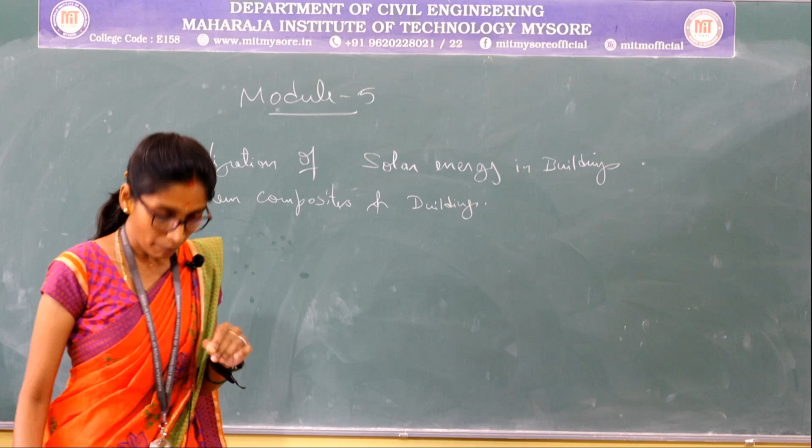Next, further I will be dealing with green composites, and then water utilization in buildings.

Next, I will be dealing with the low energy approach to water management.

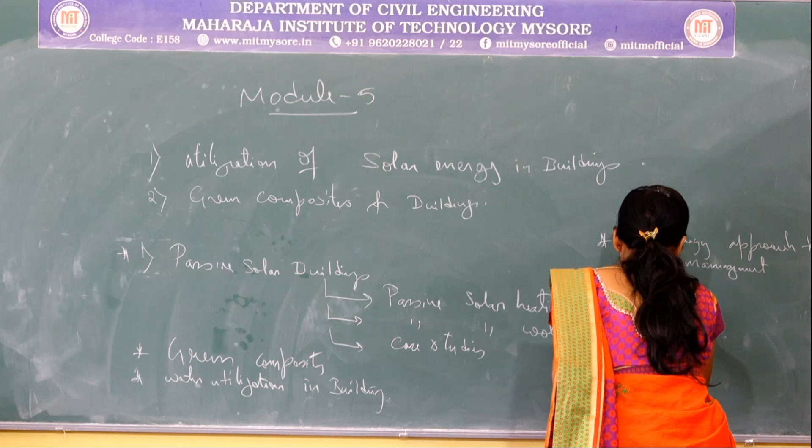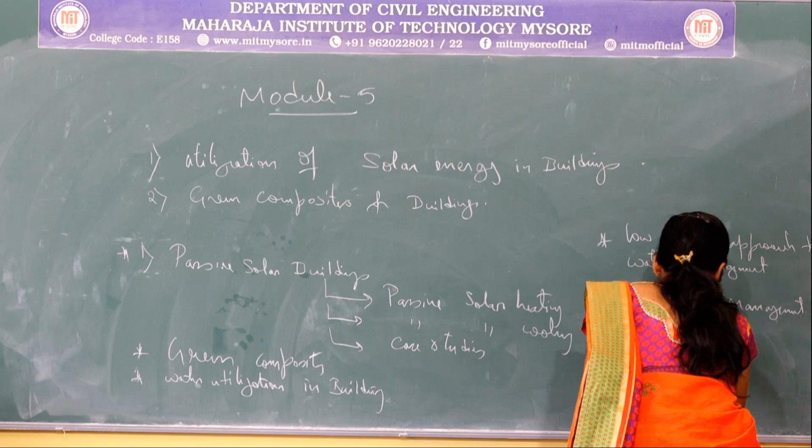Further, I'll also be dealing with solid waste management, and you'll also get to know how sullage and sewage water management is going to be considered, and what is that minute difference between sullage and sewage water.

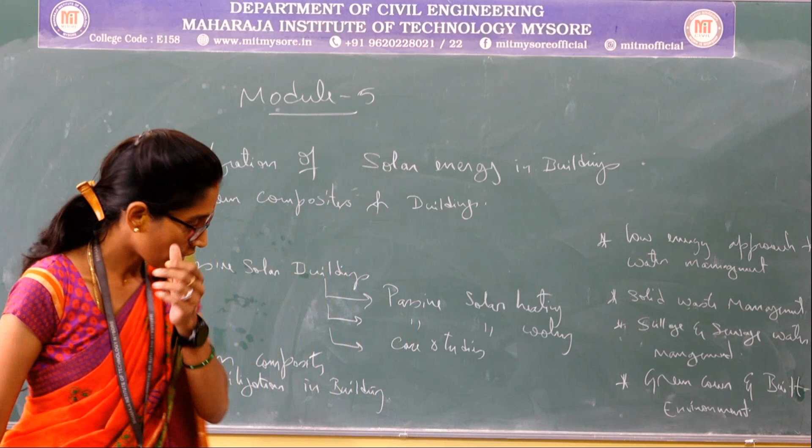And finally, I will be dealing with green cover and built environment. So these are the topics that I am going to cover in the upcoming sessions, or in this 5th module.

Now let's speak about the passive solar building. What do you mean by a passive solar building? What is it?

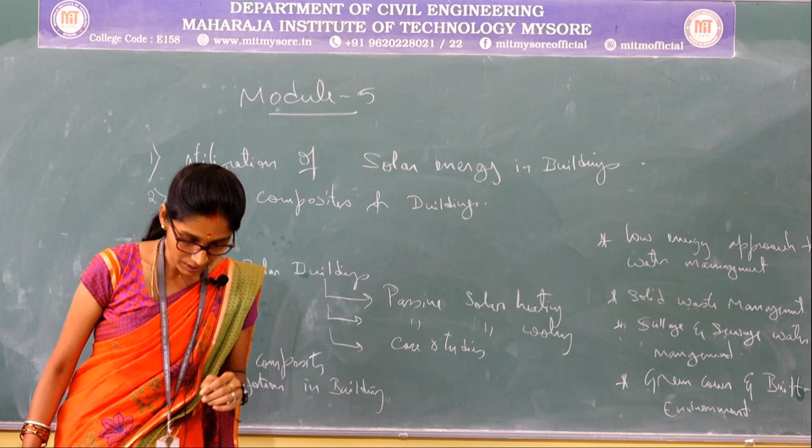The word itself lets you know that it is a passive system utilizing solar energy in a building. So it means a building which utilizes solar energy for the fulfillment of energy needs without the use of any mechanical or electrical devices or equipment is said to be a passive solar system.

These buildings will never use energies which are going to be demanded.

Instead, they are going to generate their own energy and give it to a building in order to place a human being or place a living being comfortable. Okay.

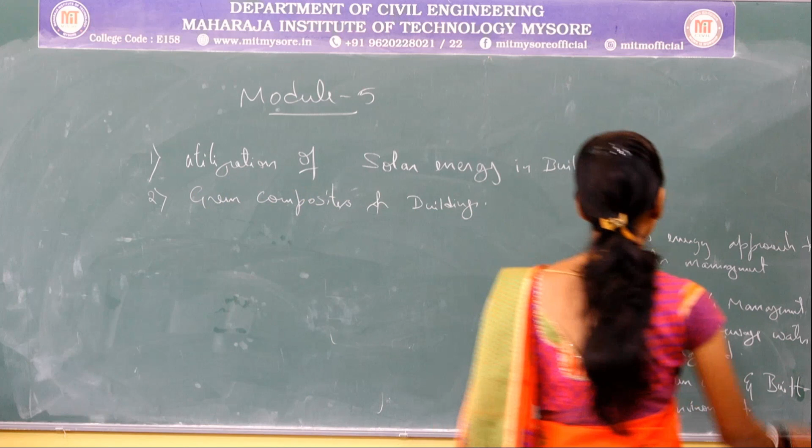Now let's see what is the concept of green building. So, green building or the passive solar buildings. Okay? So, what are the concepts of passive solar buildings?

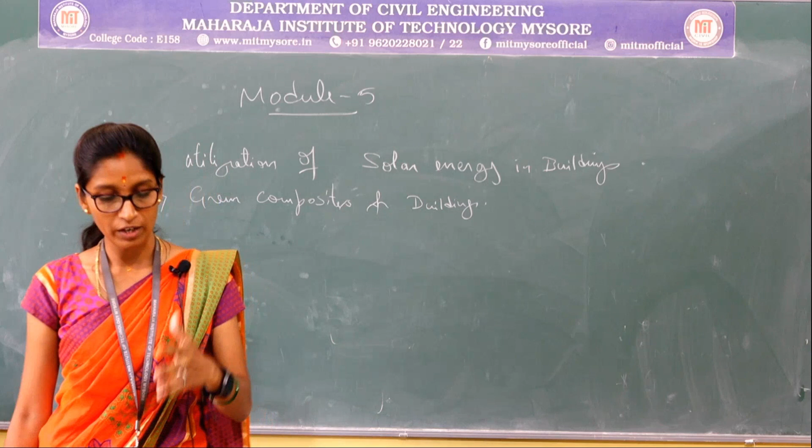The passive solar building concept is majorly based upon the elements which are being used or present in a building, and it is majorly dependent upon the windows, walls and floors which are going to absorb the solar energy during the daytime, and the same energy will be radiated or distributed throughout the entire building during the cooler atmosphere or during winters, where the room can be kept warm and comfort is present for living beings. And passive, as I already explained, comes because I am not going to utilize any mechanical or electrical devices in my building.

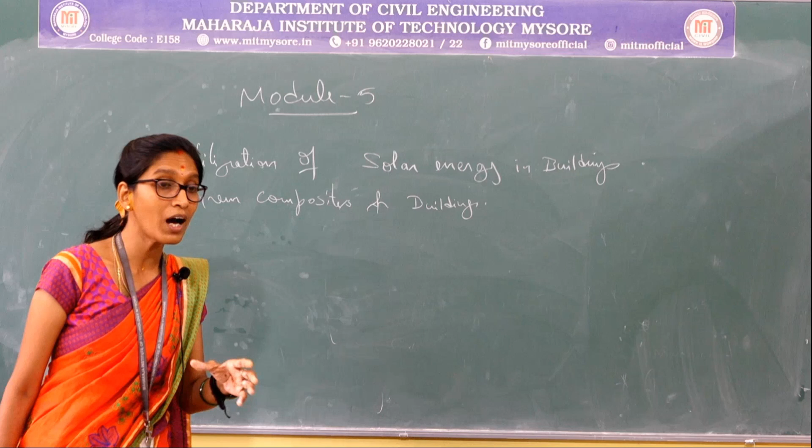Now let's see what are the principles based on which my passive solar system runs.

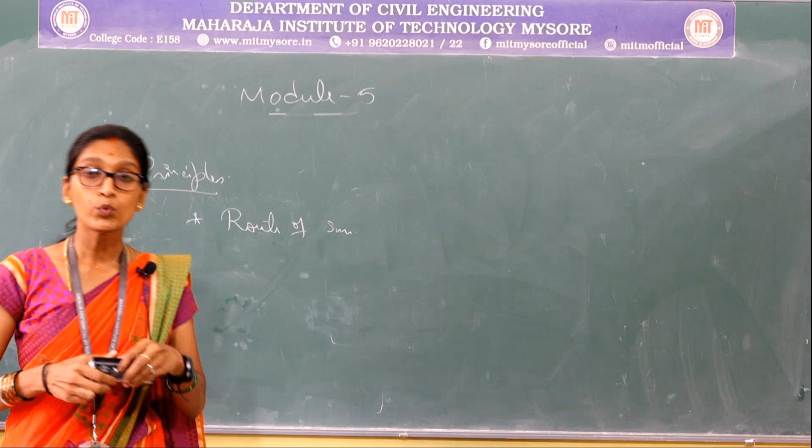Principles. So the first principle is the route of sun. It's nothing but during summer the sun will be at a greater elevation, right? Because we all know that our earth is not the sun which moves, it is the earth which is revolving and rotating, right?

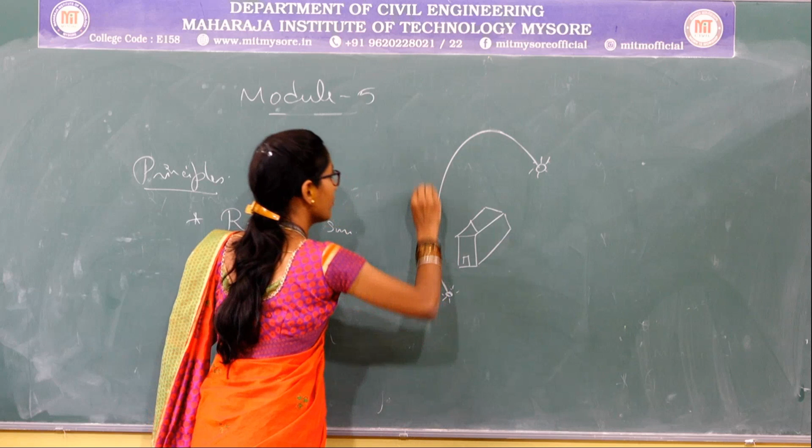So our sun will be at a greater elevation during summer, and during winters it is present at a lower elevation. So if I consider a building or a structure in this way, during summer the sun will be at a greater elevation where it rises and sets, okay, whereas during winters it will be at a lower elevation, moving like this. The shifting of the sun is only because of the tilting of our earth, that's it.

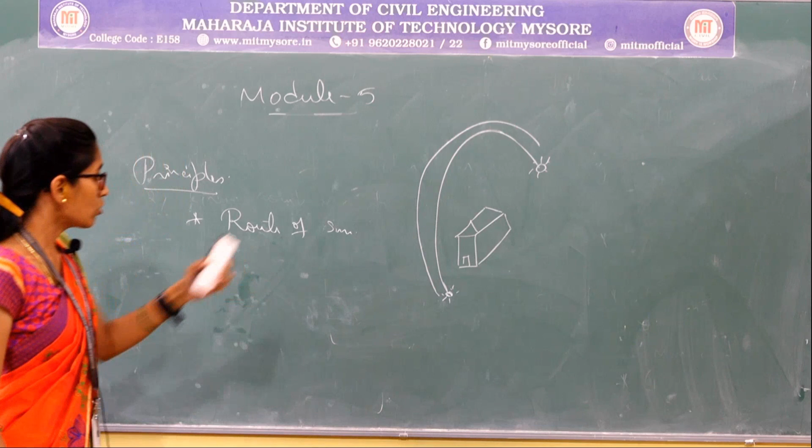So the second thing is, during winter, the doors, windows or openings which are located at the south - if I consider this to be east, this to be west, this to be north and this to be south - the windows located at the south will be receiving the major amount of sunlight or sunrise. So during winter, the major amount of sunlight will be obtained by the windows or openings placed at the south.

More energy, that is nothing but your solar radiations, okay.

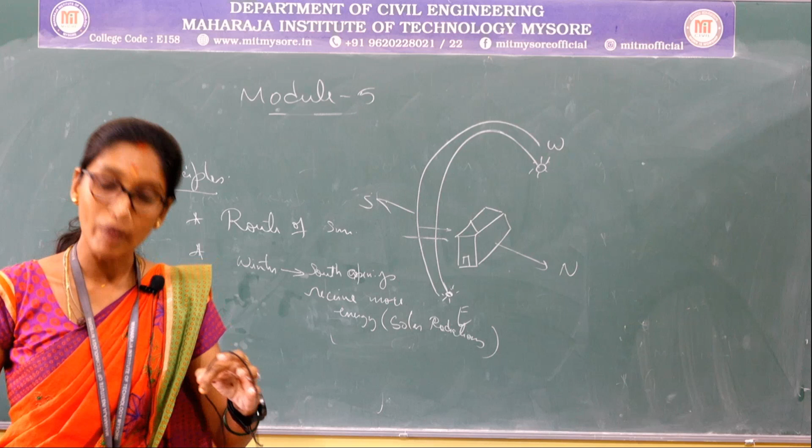The next principle is, where have you placed your thermal mass? Once we have a greater amount of openings, where is this radiation going to fall and where is it going to be stored? Therefore, it is the thermal mass located over your floors which is going to be absorbing and storing the heat energy. So the location of thermal mass.

What next? Next, in order to avoid overheating of your house or building, we have shelters, shades or hangings which will avoid excess sun rays. So that is overhangings, in order to avoid excess heating of a building, which are also said to be the controllers for that particular passive building.

Controllers, okay. Then the last one is the proper ventilation. Proper ventilation will be helping us in avoiding the overheating of our building, as well as helping us to have good air or a good livelihood in our building.

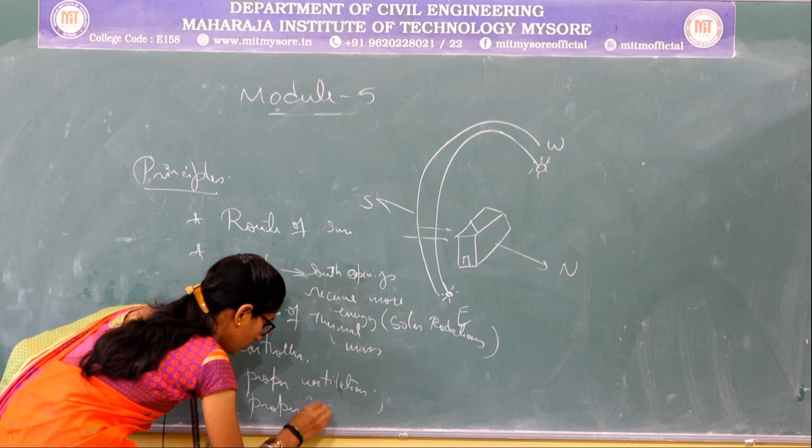And further, we have to have proper insulation. How is it going to help us? Proper insulation is when, once you have the heat being trapped inside your building, the heat should not get out, right? So that is how the insulation is going to happen once radiations have been captured inside your home.

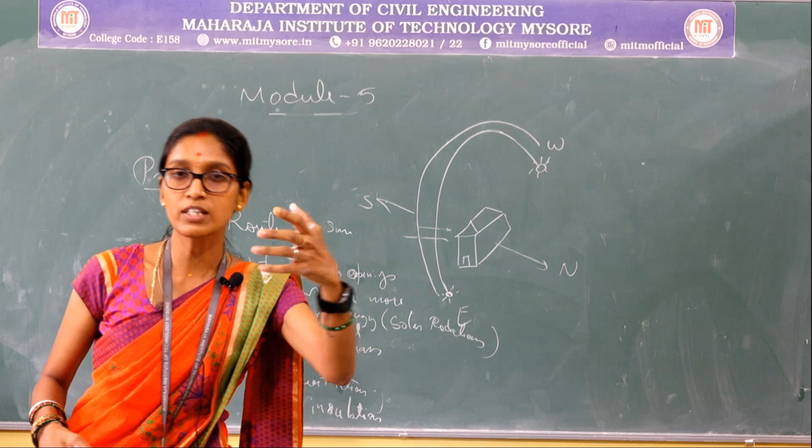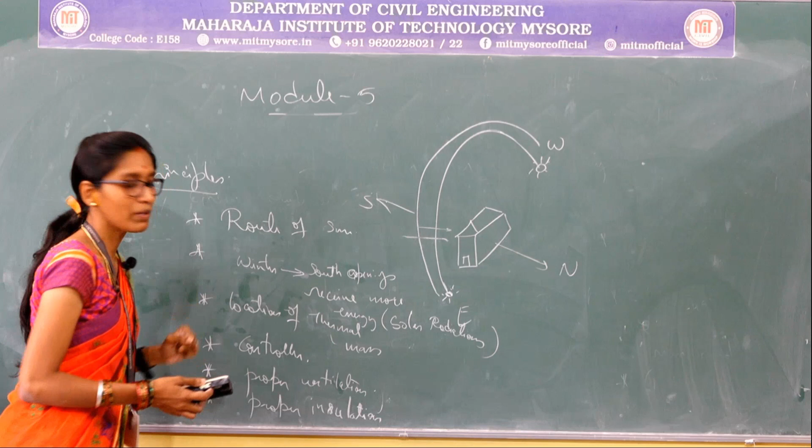Now it's summer and it's already been warmed up and now your building has to be cooled. In order to cool this system, the excess heat that is going to get inside should not be coming in, right? So that is how you are going to insulate the building - during summer, excess heat should not enter into your building, and during winter, whatever heat is trapped or whatever energy is present inside your building should not get radiated out. So this is all about the principles based on which your passive solar system runs.

Now let's see what are the elements that are being considered or present in a solar passive system. Okay. Now, so let me draw a sketch first.

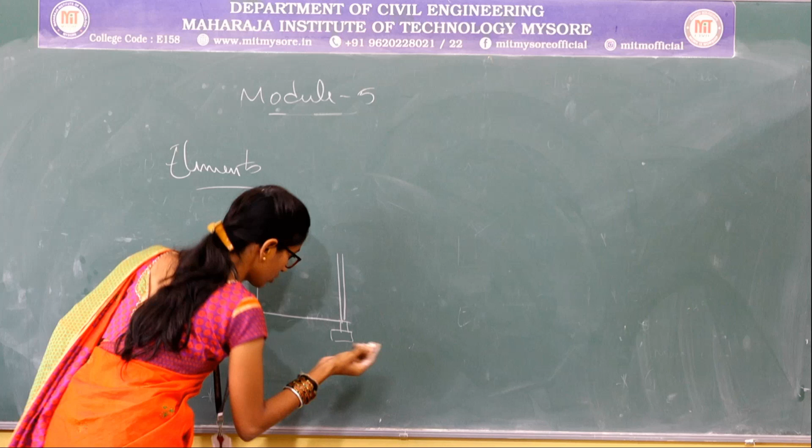So if I am going to consider this to be a structure, here's a foundation. Say for example it's a frame structure, so I'm just drawing it like this. This is your floor, and this is your roof. Let me provide you a 3D looking sketch where it will be much easier to understand.

This is where you are going to provide a shade, or close it whenever the sun rays are too much, or whenever the heat already present inside your room is sufficient. And this is your floor, I am just shading it in this way, that's it.

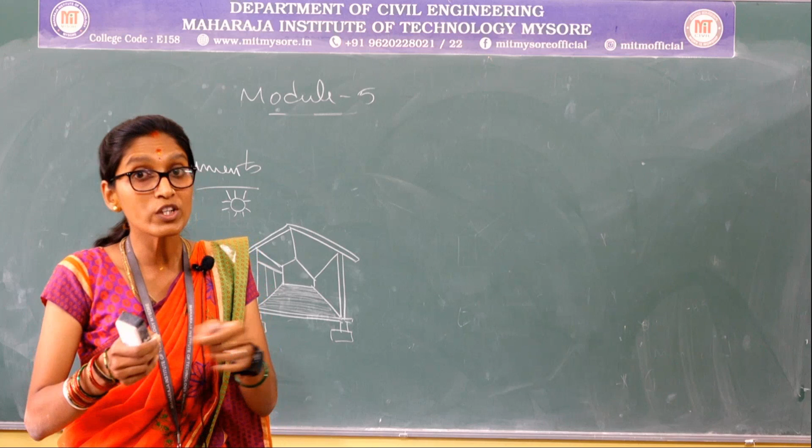Now, as I have already told you, the sun will be at a greater elevation during summer. How can you say that? You might have seen during summers that once it is 12 o'clock, the exact shadow formed beneath you is barely seen, it will not even move an inch. But during winters, even at 12, you will be able to see that slight variation in the shadow, through which you can make out that there is a tilting or route change of the sun.

So this is the summer sun, I'll just place it at summer sun. And next, during winter, my sun is at a lower elevation, so winter sun.

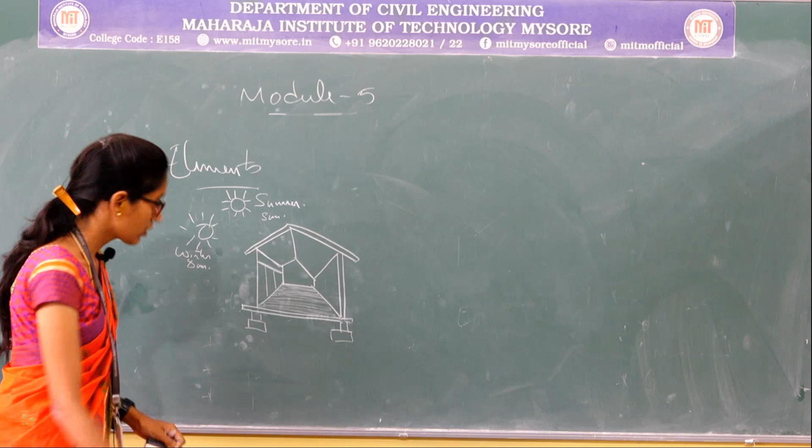Now what happens? The radiations of the sun are going to come. First let me explain with our winter sun. So once the radiations are coming or entering or falling into a particular building, some of the radiations will obviously enter the building through the openings present in it.

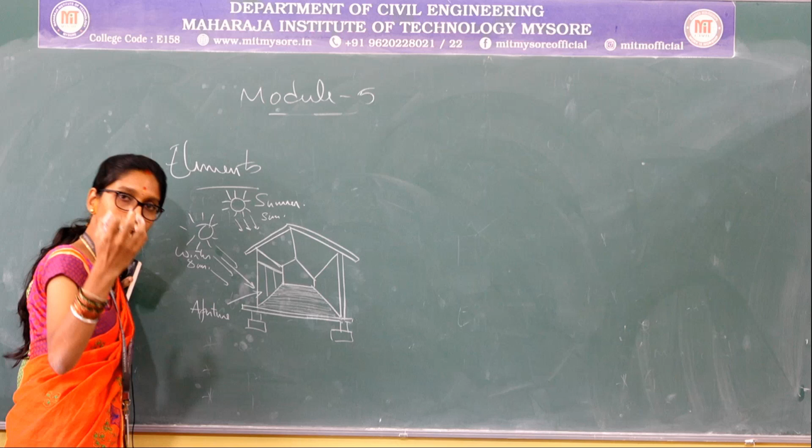These openings are nothing but, it can be a window or any type of glazing openings, glazed openings. So I can call this an aperture, which acts as a capturer, or which captures the sunlight into your building, which allows the sunlight to enter your building. So what is the function of this aperture or opening? To capture.

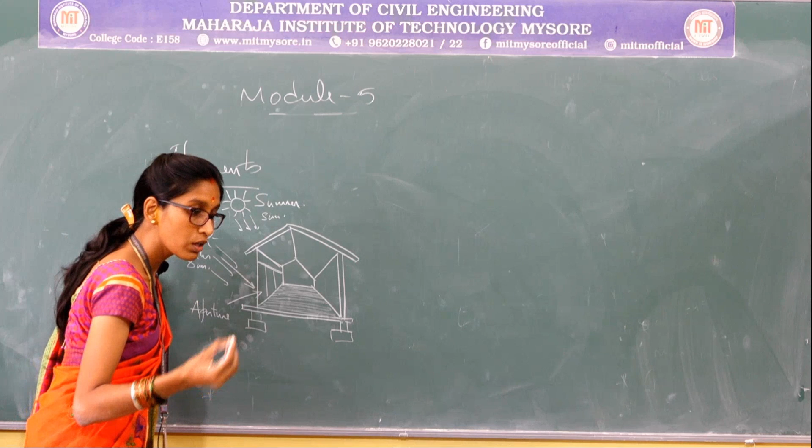Next, whatever sunlight is falling through this capture or through this aperture onto your floor, it is going to absorb that heat. So this floor is going to act as an absorber.

Now the floor is made up of some concrete elements, which is capable, it can be a concrete element or any other flooring material, which is going to have the ability or which is capable of storing these heat radiations in it. So this is nothing but the thermal mass. So what is this thermal mass going to do?

Once the absorbed energy comes to a particular material, it is just going to absorb it and store it. So once this solar energy is stored in this thermal mass...

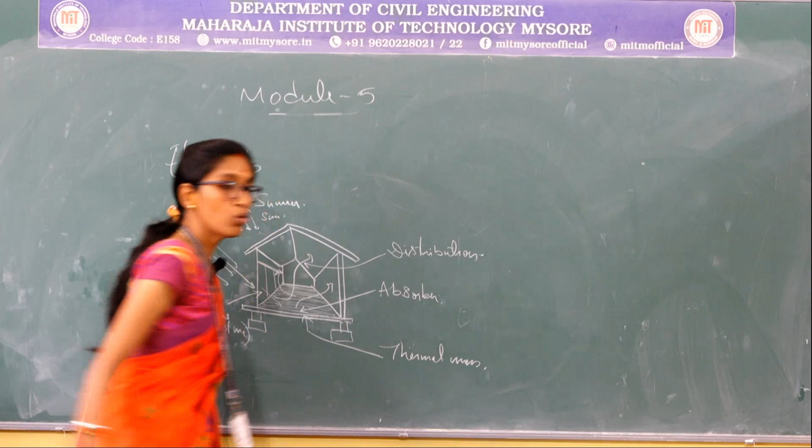During the cool seasons, or during the cold atmosphere, once the temperature is lowered at the atmosphere, what happens? These heat radiations are going to radiate inside the room or building. So it is just getting distributed. So distribution of the solar radiations or the heat radiation is taking place.

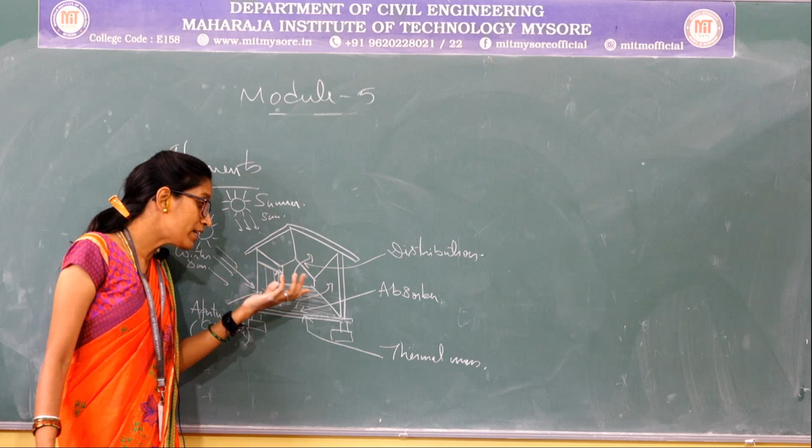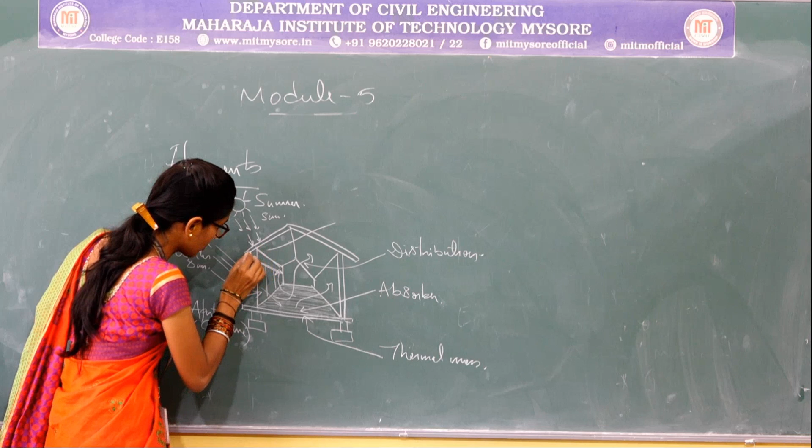Now, in order to avoid excess heating up of this building during summer, as the summer sun has got a higher elevation, if I am going to use eaves, or shades, or overhangings, what is it going to do? It is going to restrict, or control, the excess heat radiations which are going to get inside a building. So these overhangings are nothing but your controllers.

Okay, these are the elements which are present in passive solar buildings and their working principles. Now tell me, which are the various elements present in a particular passive solar building.

So the first one is your capturer. Once the heat or light is captured, it is let into your building, and then the absorption of that light or solar radiation happens. Once absorption is completed, the thermal mass tries to store the energy or heat radiation.

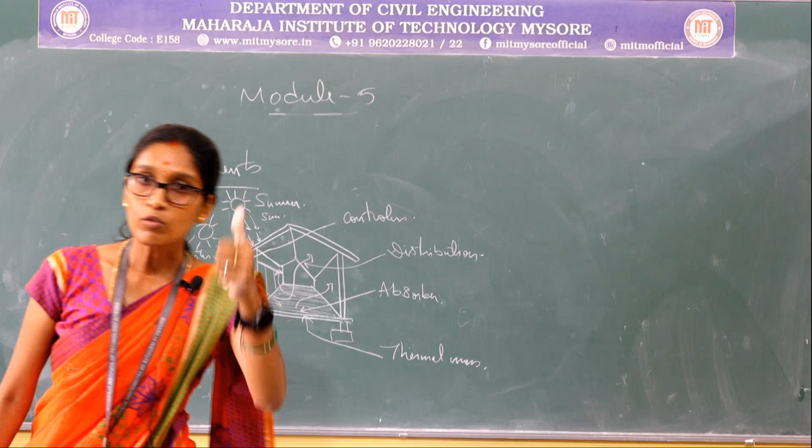Next, once the temperature is getting down in a building, the distributors try to radiate those heat energies throughout the building, providing warmth. The last element, which helps control overheating, is the controller, provided as eaves, overhangings, or shades, which help avoid overheating by providing shade.

Now let's see what are the benefits of this passive solar system. The first benefit would be that excess energy or excess electrical energies, which are providing a larger carbon footprint and causing global warming, will be reduced. So there is low energy requirement.

That is, outsourced energy requirements are reduced. Outsourcing is not required for me, only with natural light and heat it will be done.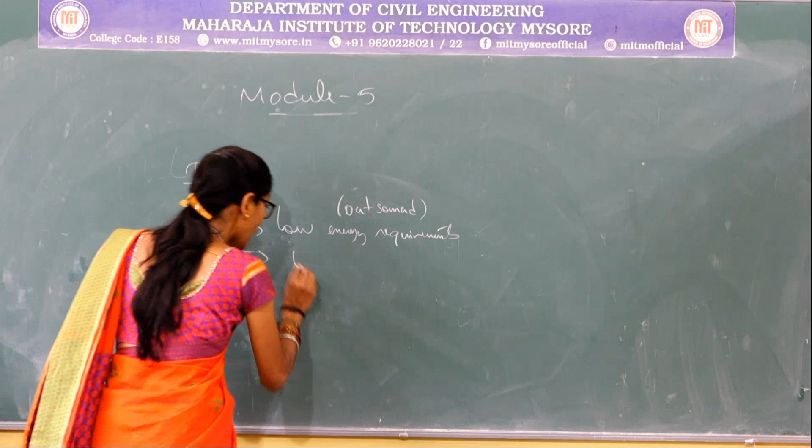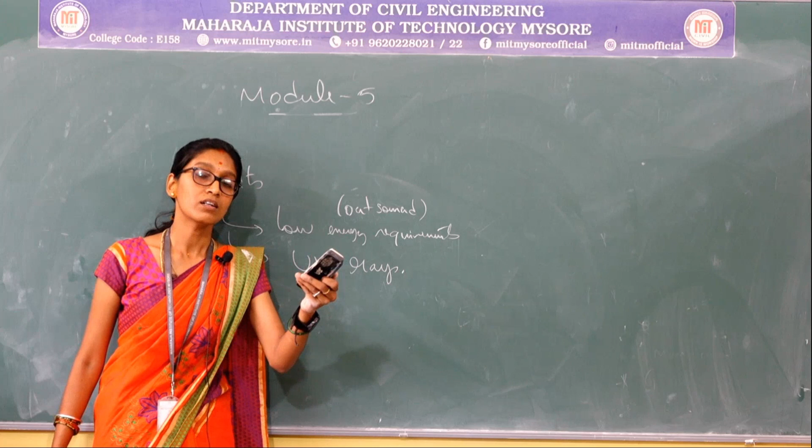Next, what is the other one? High amounts of ultraviolet radiation will be prevented from entering the building, through which various other harmful effects caused by ultraviolet radiation will be prevented.

And then the bright appearance of the interiors will happen. Due to excess lighting control, glare will not be present. And due to the low amount of openings in a building, a dull effect will not be present either. So glaring as well as dull effects will not be present, hence the bright appearance will be present in a particular building.

What is next? During summer you will be having a cooling effect inside the building. And during winter you have the warmth inside. So winter is warm.

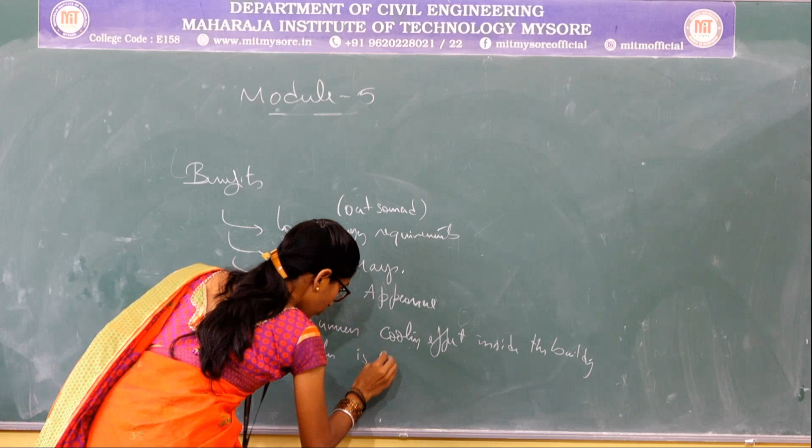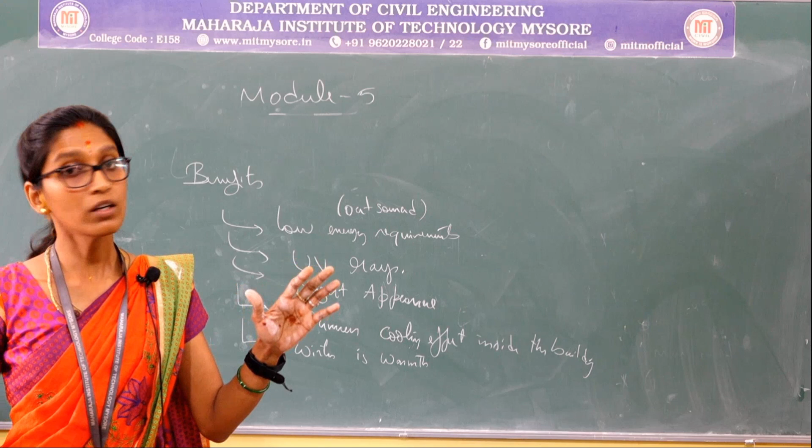During summer, excess heat won't be coming in, and the system will be cool enough to have good comfort in our building. During winter, we won't feel so chilled that we want heaters. Instead, our passive solar system buildings can take up the warmth and provide comfortable living for a living being. So these are the benefits of the passive solar system.

Now let's see what are the disadvantages or ill effects of passive solar buildings. Majorly there are only two. One is overheating of the building, and that can be avoided, as I have already told you, by using respective shades and controllers. I can overcome it. But how does this overheating happen?

This usually happens because of negligence shown by a designer. If the orientation varies, if the design criteria is altered, or if there is any mistake present in the construction, this may cause overheating, but it can be resolved. It's not like it cannot be resolved.

But the other issue is perception - how a particular person feels when new research is coming in. The difficulty is that we are not ready to accept new technology coming in. Instead, we need to have a good perception by knowing the concepts present in this technology. So designers, the public, the contractors, are not ready to give up their designs, their criteria, and the aesthetical appearance of a building for the sake of energy conservation.

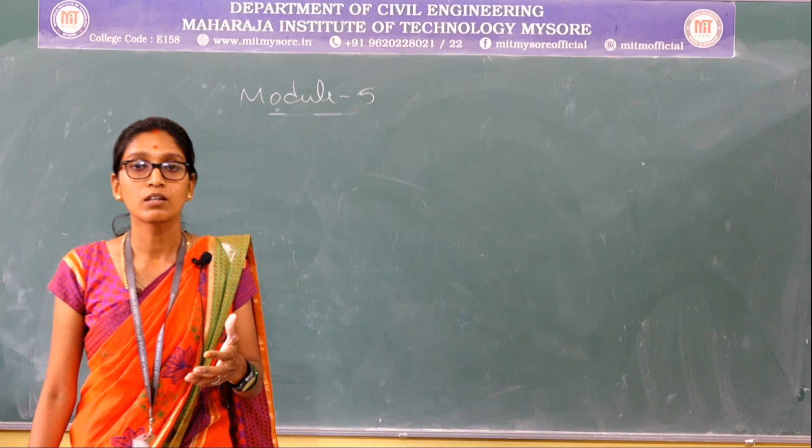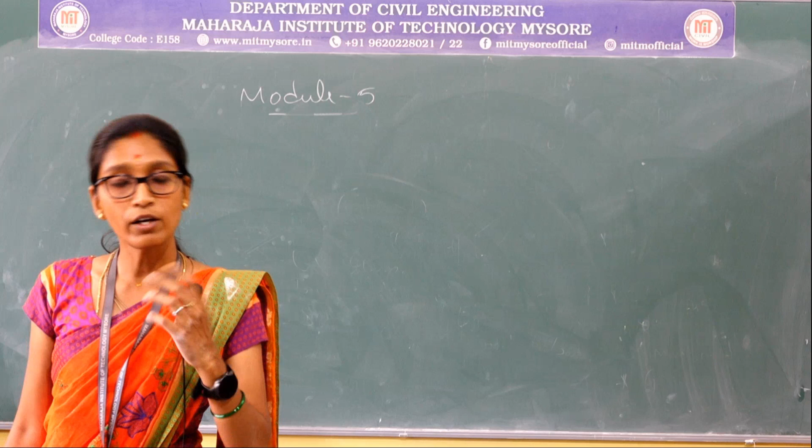So they are not ready to live with these things in order to conserve energy. If at all I have a concern about my energy, or about my solar system, about my Mother Earth, I will surely be concentrating on the energies which I have to serve or reserve, and also what impacts are going to be falling on it.

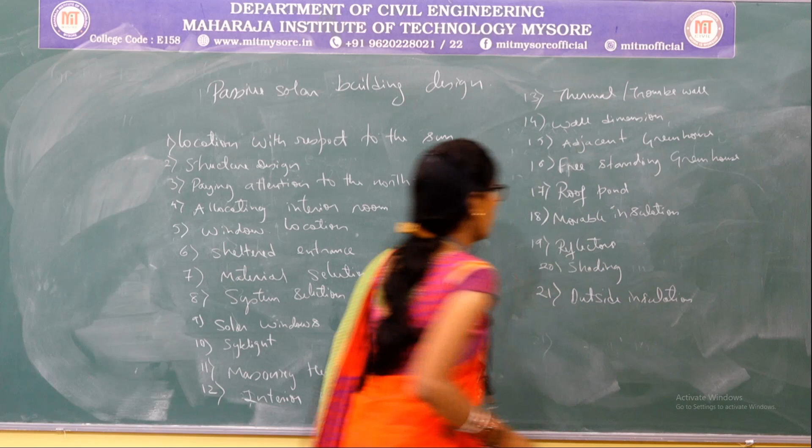So now let's start with the next concept, that is passive solar building design.

It is very important that whenever I take a particular project, I remember its design criteria and design parameters in order to have an effectively and efficiently working system. The first one is location with respect to the sun, that is with respect to the solar radiations or heat energy getting into a building, where I have placed my openings, the window openings, horizontal or vertical, through which the sun is going to directly fall into the living area, where capturing of the heat radiation is going to happen. So that becomes very important, where I have located my building.

Next, structural design. It all depends upon the shape and orientation of a building, where and how, in which direction the building is being placed. It is usually recommended to have a greater length in the east-west direction, so the building is elongated in its east and west direction.

So the next one is paying attention to the north side. As I discussed previously, during winter the sun radiates through the south, and the north side wall is not going to have any function, it's not going to absorb any heat from the sun. It is not going to be subjected to a greater extent to the sun or solar radiation, so why simply increase the height of the wall there?

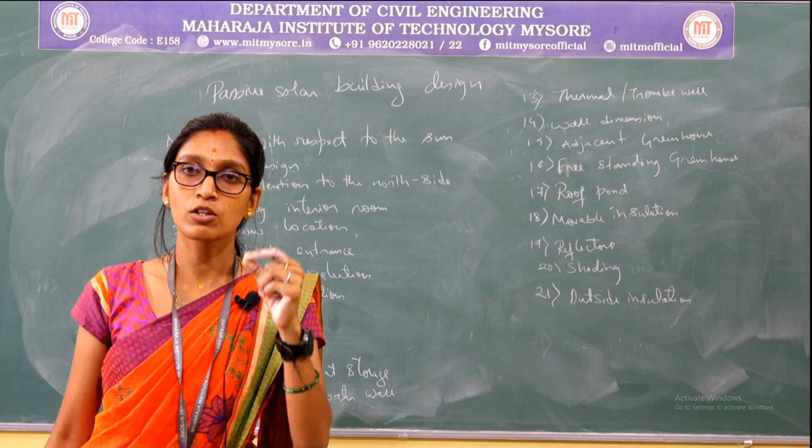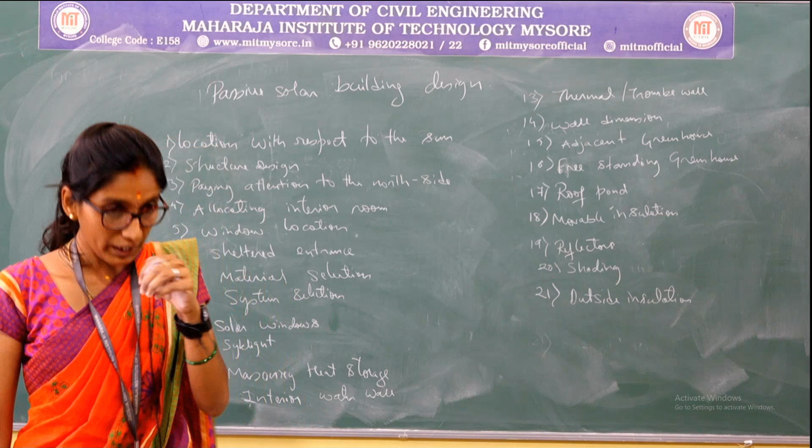Each and every project has its own importance, as well as its own design criteria, just as our own taste keeps varying. Let me take an example. If I am constructing a building with a passive solar system, I place openings all around, with most provided at the south. But the major issue is that the entire building is surrounded by other buildings which are at a greater elevation. So now the openings provided are not serving the purpose, and the heat energy that has to get into the building is not coming. Now what are you going to do? Is it serving the purpose of solar passive heating? No.

So the system selection becomes important. Instead of providing those openings and glazings in the south direction, if I provide it at the top, overhead, it might serve the purpose. This is how I select the system based upon the location and the various projects I undertake.

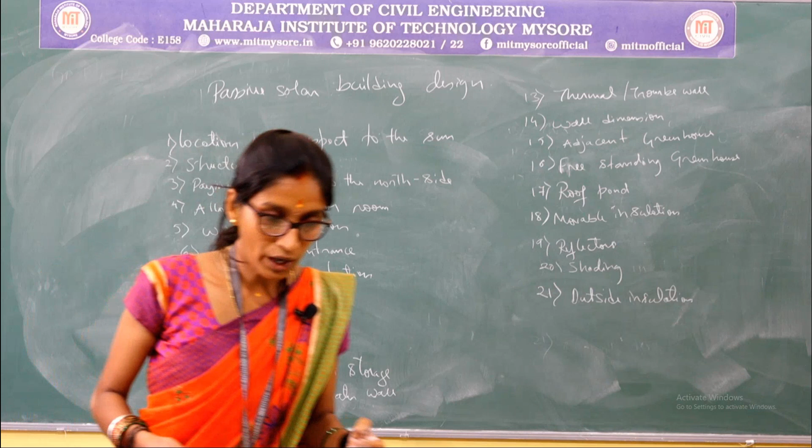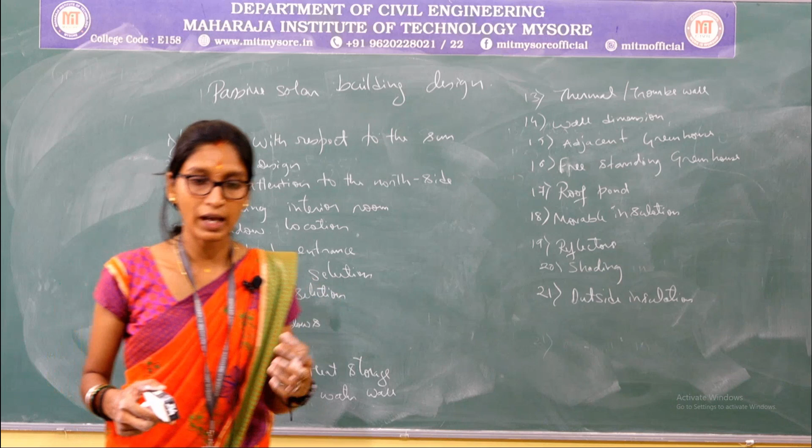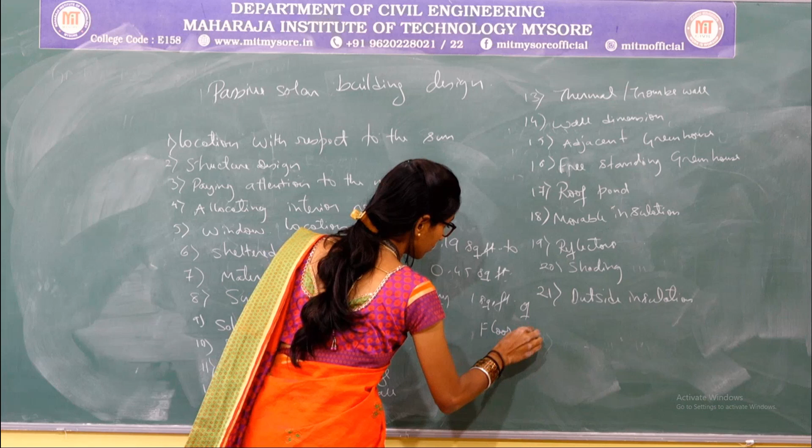The next one is solar windows. Most of the time the windows we use will be glazed ones, which serve the purpose of passive solar heating. So what should this solar window have? It should be projected at the south side where the greater amount of heat is coming, and it is recommended that a minimum of 0.19 square feet to 0.45 square feet of opening be provided for every 1 square foot of floor area. This is what is recommended for solar windows in order to have a properly and effectively functioning passive solar system.

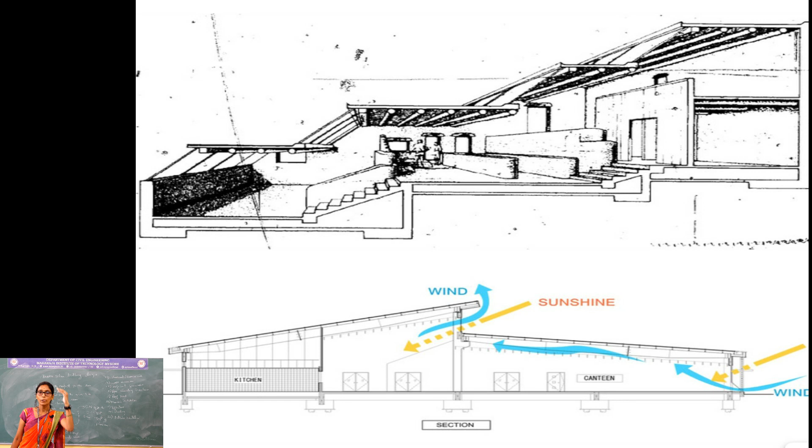The next one is skylight. What is this skylight? I discussed this while covering system selection. The openings or glazing provided at the top are nothing but skylights. So depending upon the requirements of a particular building and its location, I will use skylights, which enhance the efficiency of passive buildings.

The next one is masonry heat storage. The thermal masses we utilize in passive solar buildings play a major role. These masonry walls I construct for my building should have a minimum 4-inch thickness, which will effectively absorb the heat energy and then store it. This becomes very important in case of masonry heat storage.

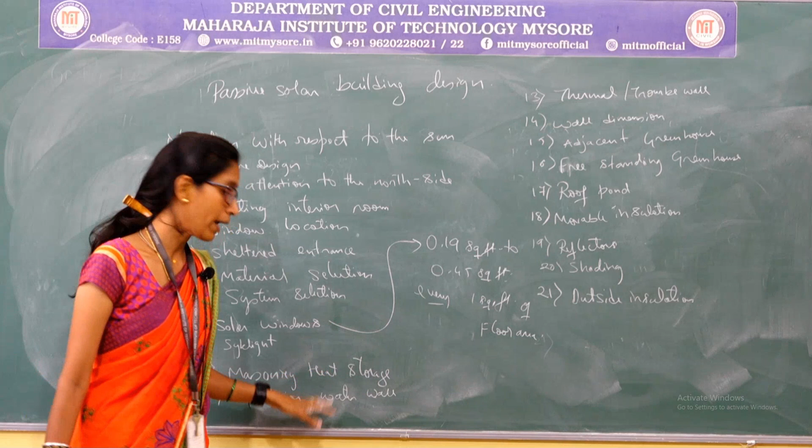The next one is interior water walls. If I use interior water walls to store the absorbed energy, instead of a floor acting as thermal mass, now my water walls act as thermal walls. I will explain this with diagrams in upcoming sessions, which will make it easier to understand. If I use vertical walls of water for energy storage, it becomes important that a sufficient amount of heat energy gets into or falls over my water wall.

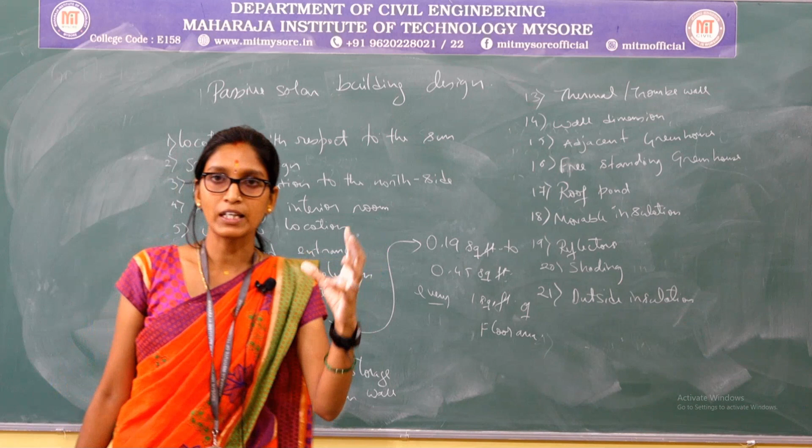So water wall should be able to receive a greater amount of heat energy, right? So that this water, which is going to heat up and cool down slowly compared to other materials, gets a good amount of heat energy which will serve the purpose of passive heating. Therefore we need to place this wall such that the sun's peak light is maximally falling over these water walls, so it's supposed to be placed maximally towards the south. The peak hours of the sun are majorly between 11 AM to 3 PM, and during that duration daylight will fall over the water walls which will be capturing the heat.

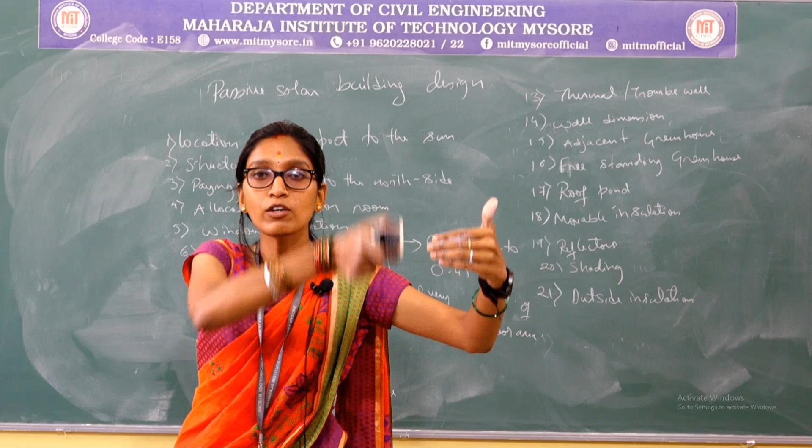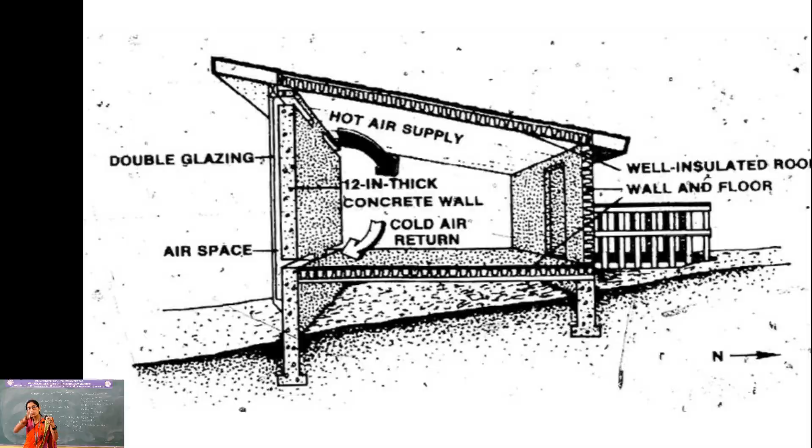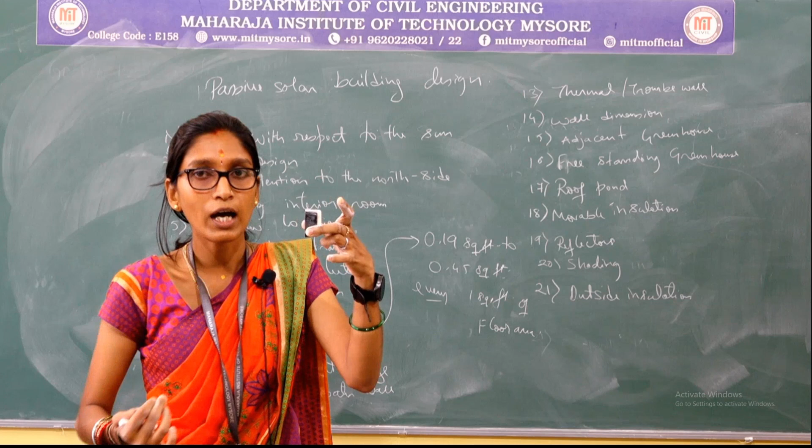The next one is the thermal or therm wall. Instead of directly letting the heat into the ground surface, I am making a barrier, a vertical wall. So here I was using a water wall, now I will be using a masonry wall or any wall material, which will take up the heat, absorb it, and radiate it later when the atmosphere in the room comes down. This process happens not directly but through conduction. The material heats up on one side, and through conduction the heat travels towards the other end of the wall, and then finally gets radiated. The other side is usually heated up most probably during 4 to 5 PM, because the heat energy has to travel from one end to the other. This property depends upon the material I select.

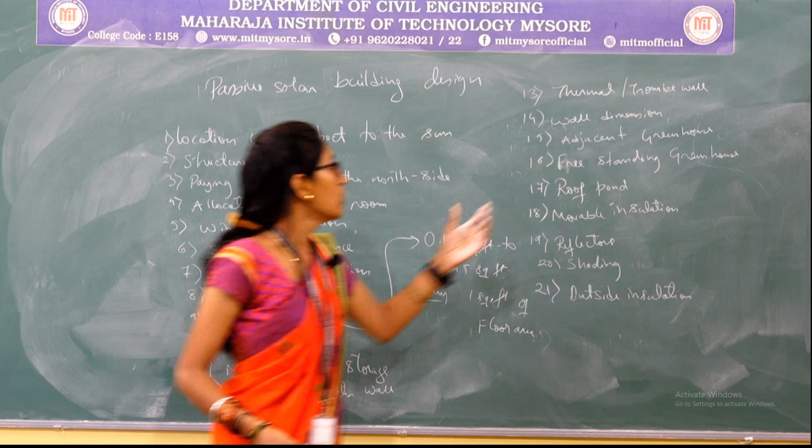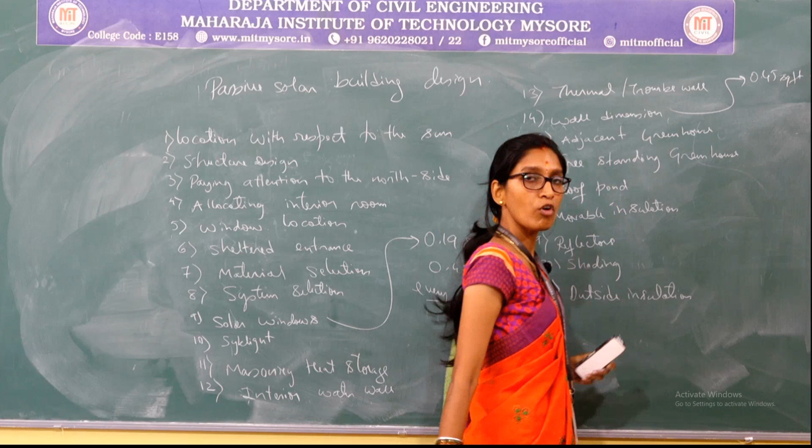So next is the wall dimension, majorly with respect to the interior water wall and the thermal or Trombe wall that I am going to provide. It is recommended that 0.45 square feet to 1 square feet of thermal mass wall or Trombe wall is provided for every 1 square feet of floor area, if I am going to use a Trombe wall.

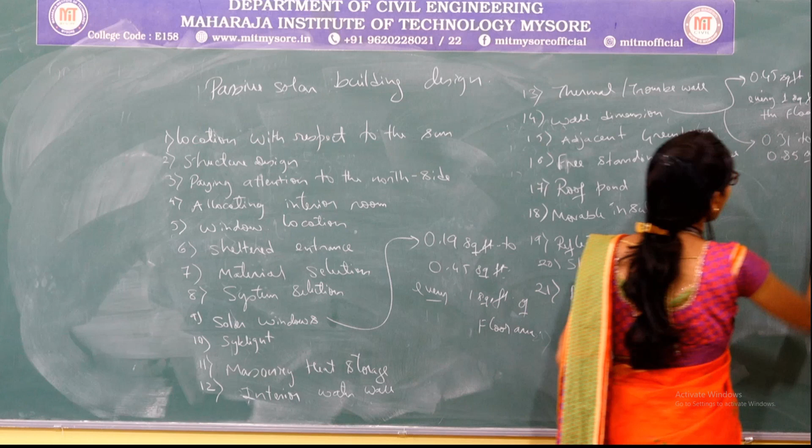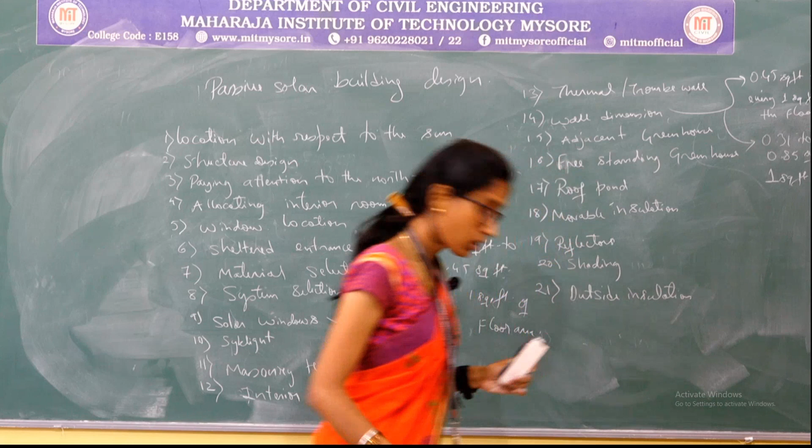If I am going to use a water wall for that purpose, then it is recommended that 0.31 to 0.85 square feet of water wall is provided for every 1 square feet of floor area. So this is how the wall dimension is recommended and plays a major role.

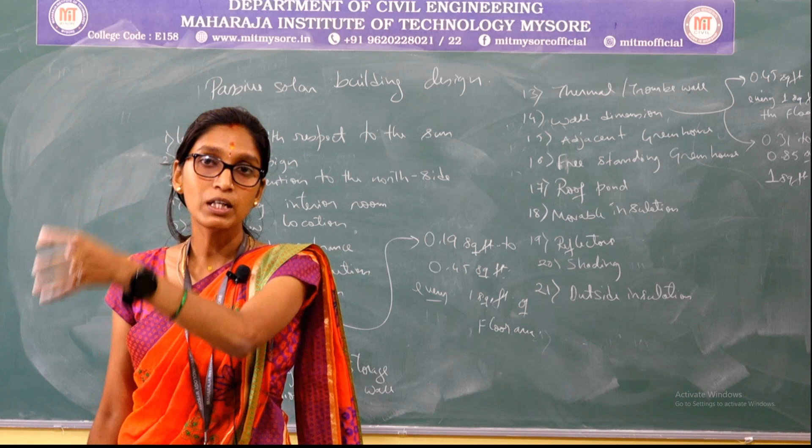The next one is adjacent greenhouse. It is quite complicated to design an adjacent greenhouse because the energy has to be derived from the greenhouse to the adjacent building or living area which will be dependent upon this greenhouse. Therefore it becomes very important to have a correct calculation of the greenhouse dimension.

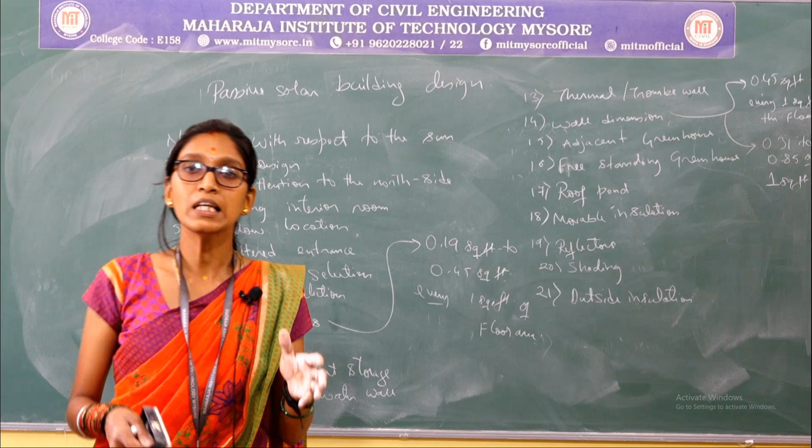The next one is freestanding greenhouse. Quite interesting - we all know the greenhouse will be constructed using glazings, so glazes will be present, and these glazes are usually translucent in nature. So whatever heat radiation or solar energy gets in will be trapped inside for a greater duration, because it also has good insulation property. But in order to have proper working and good efficiency of a building even during winter seasons, we need to have thermal storages inside the greenhouse, such as rock storages or water that can be utilized as thermal storage, or any concrete masonry walls would serve the purpose, constructed inside a freestanding greenhouse.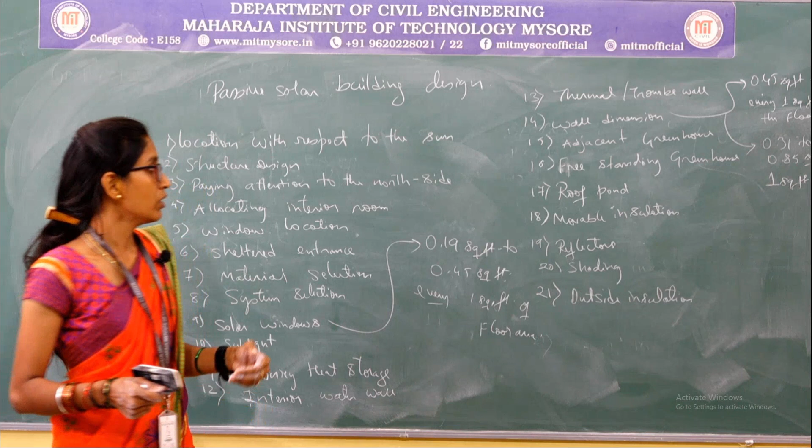The next one is the roof pond. This becomes important in order to know why I am providing this roof pond - whether it is to cool a building or to heat a building. So what purpose is going to be served by the roof pond? It is recommended that we need to have a minimum of 6 to 12 inch depth - these water ponds should be at least having a depth of 6 inches.

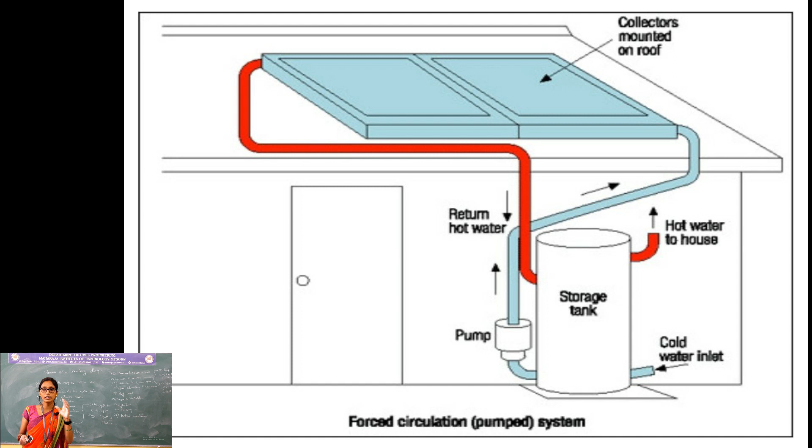These water ponds or roof ponds should have a dark color covering or paint over its surface. At the same time, they should be insulated and watertight - a waterproofing paint should be provided over the surfaces. Why is this required? Instead of serving the purpose of heating and cooling, it should not leak. That's why it's important to seal and waterproof the system, as the pipes will be let out through the same roof pond. So it's very important to ensure it's leak-proof or waterproof.

So the next one is movable insulation. Whenever insulation is required for a building, in order to avoid the moving of warmth or hot air present inside, we use movable insulators. 90% of the heat radiation exchanged due to variation in climatic conditions can be reduced using this movable insulation. The insulators are like screens that will be moved, the way you move a screen to close a window. In that way we move our insulators from outside towards the various materials we are going to use.

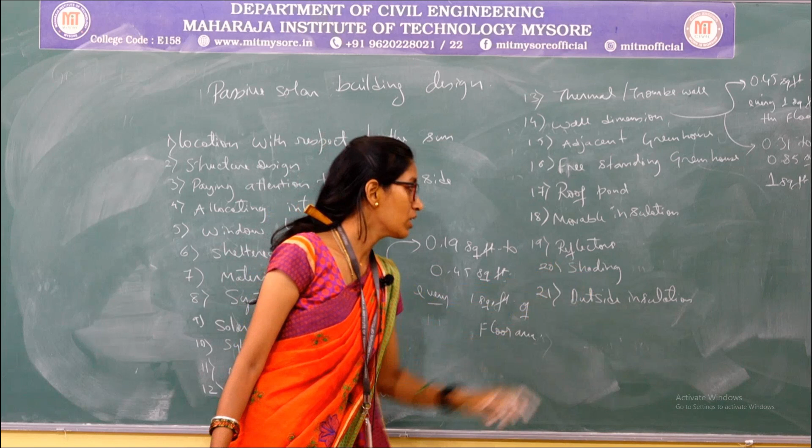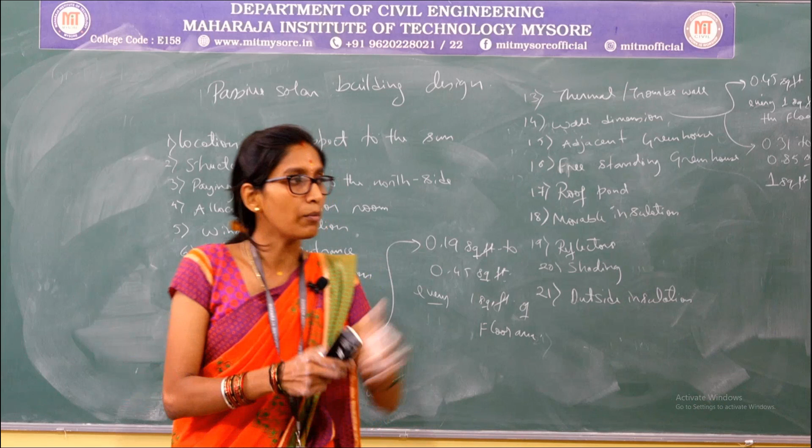So the next one is reflectors. It's very interesting - whenever the openings provided to a building are not getting a sufficient amount of energy, or whenever the area to be covered is greater compared to the opening present, in order to increase the efficiency of solar radiation getting into a building, we use reflectors at the top or at the bottom. There are many such buildings using this criteria. I'll let you know once I start the case studies.

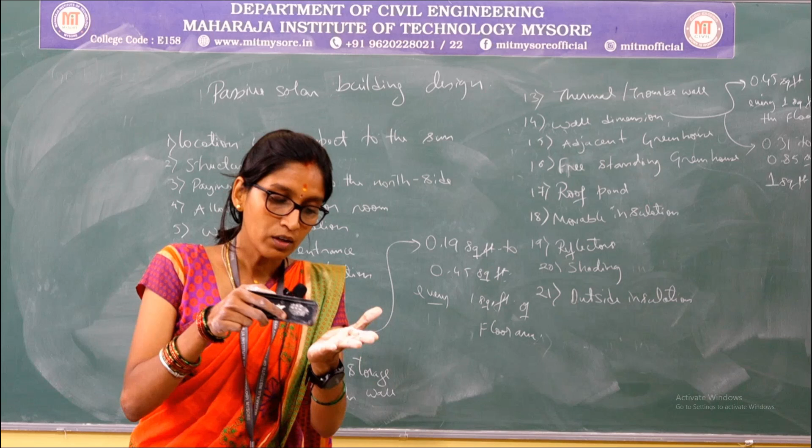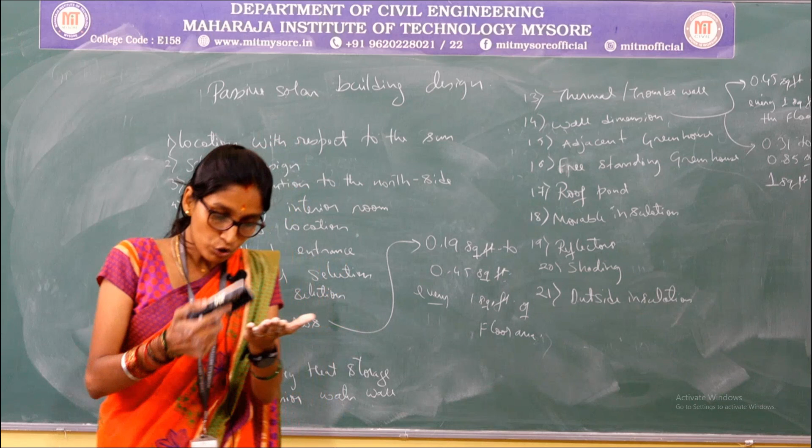So now the reflectors run on the principle we all know from a mirror - when radiation hits it, it gets reflected at the same angle. The incident ray and reflected ray have the same angle of inclination. Using that principle, these reflectors direct the sun's radiation into the building. That's how it increases the efficiency of a passive solar system.

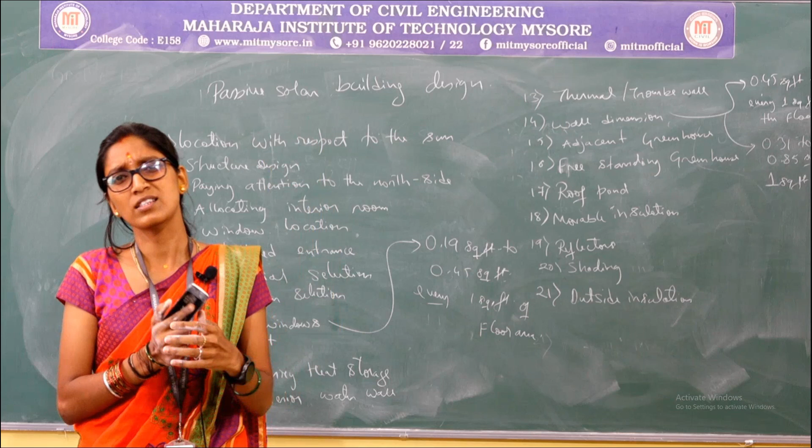So the next one is shadings. These are nothing but external projections provided for openings in order to avoid excess heating up of a building, or to reject excess light entering into it. As per recommendations, the shading should be a minimum of one-fourth of the height of the opening I am going to provide. Whatever I am speaking, you can see in the projections, which will give you a clear picture of everything.

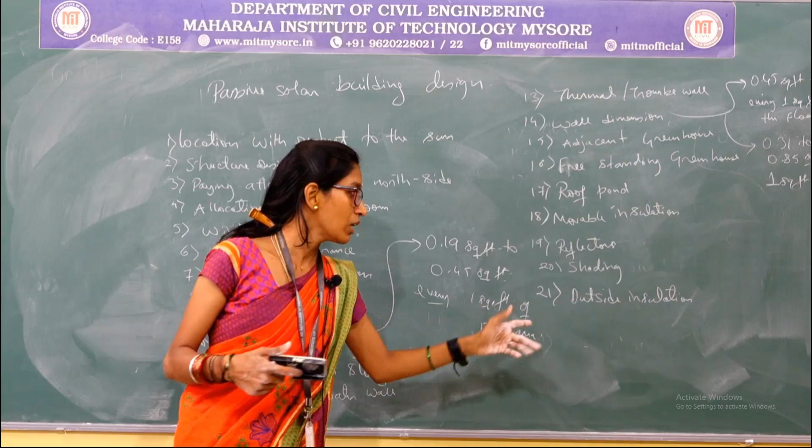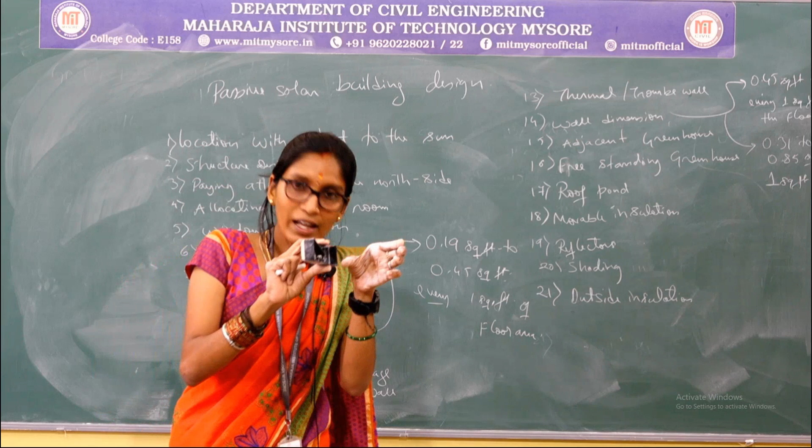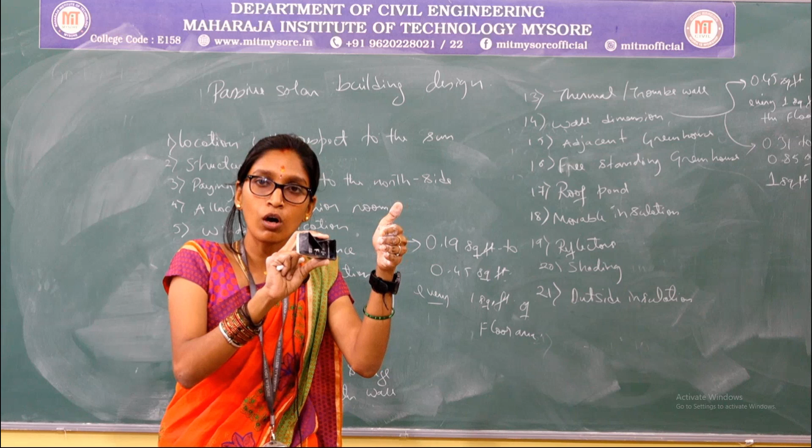So now the last one is outside insulation. This is used whenever I am using a trombe wall and a double glaze system outside - you'll get to know this in detail in upcoming sessions. If I use such a structure, this is a wall, and this is a glazing provided, with an air gap present between the trombe wall and the glazing. This heat energy, though the thermal mass or trombe wall has heated and through conduction will be heating up or providing warmth to the internal surface of my building, there is still a gap between these two. Even though I have made a specialized glass which is self-insulating, still a good amount of radiation may escape as greater lowering of temperature takes place in the atmosphere.

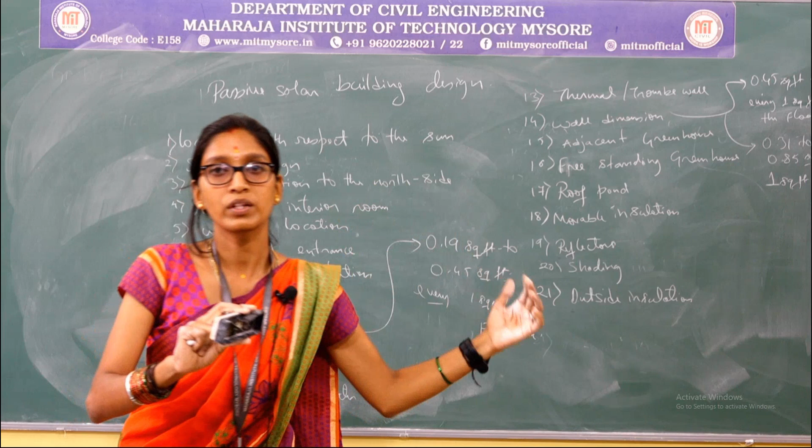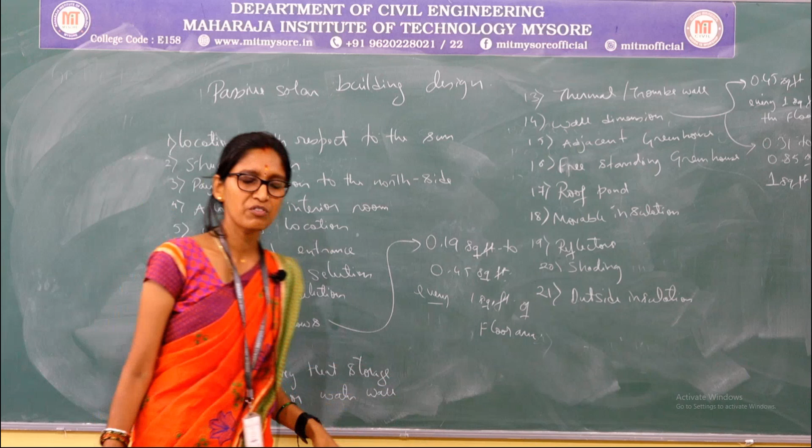So in order to avoid that escape of heat energy through the glaze surface, I will be using this outside insulation or outside insulators. Again, these are movable, and I will be covering the entire surface of the glaze with these outside insulators. We do have a greater amount of design aspects to remember, but this would be sufficient as per the syllabus.